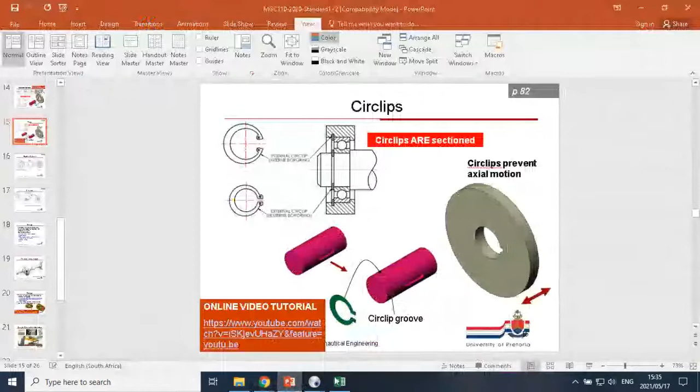And if you use a key and a circlip together, then you basically lock the two components together. So prac assignment 4 marks should probably be out, I don't know, probably this week sometime still. So those were circlips and keys.

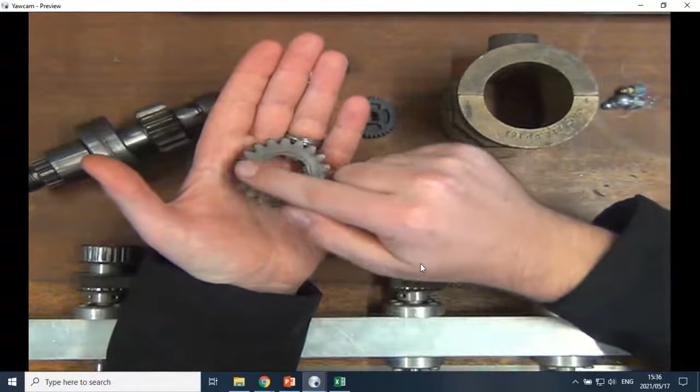Let's quickly discuss repetitive features. Here I have a metal gear, just an example. You can notice this metal gear has many teeth around the circumference, and they're all exactly the same, just a pattern of the same one all the way around. So if you draw this thing, it would be kind of pointless to make a detailed drawing where each of these teeth are actually shown. A shorter way to do this is to draw one of them and then just show a center line to show it is patterned all the way around.

Another application could be bolts that are assembled on the same pattern, like the bolts that hold a truck's wheel in place. So instead of drawing all of them, you can draw one of them and show the center lines for the rest of them.

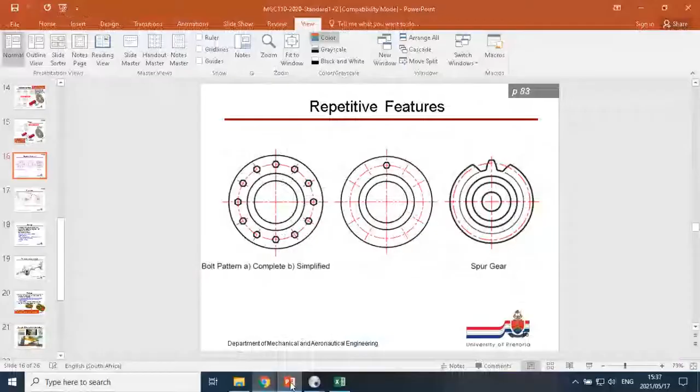Cool, thanks for answering the question for me. Okay, next we've got a chain drive, that would be something like your bicycle. They use chain drives.

Let's quickly have a look at a chain drive mechanism. Okay, sorry for the people who get seasick very easily.

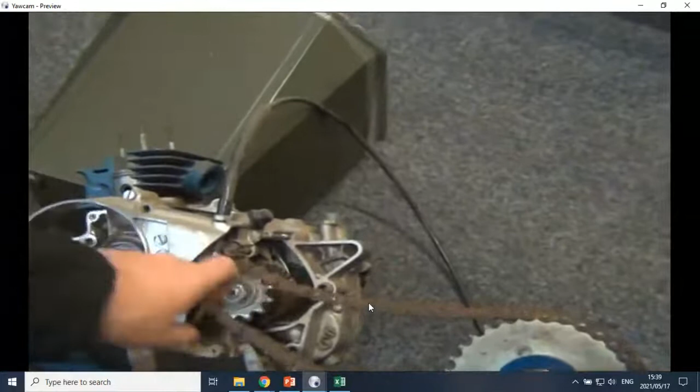Okay, so there we have a cut open motorbike engine on the floor in my office. At the front here we have the front sprocket, there's the back sprocket, and as you rotate the one, the teeth will pull on the chain, which causes the back sprocket to also rotate. Front sprocket, back sprocket, chain. So you can drive the back one by turning the front one.

The same principle applies with gears as well. A gear is used to link two shafts in a rotating manner. You would have the two gears meshed into each other, and as the one gear turns, it causes the other shaft to turn as well. So that's a means of power transmission.

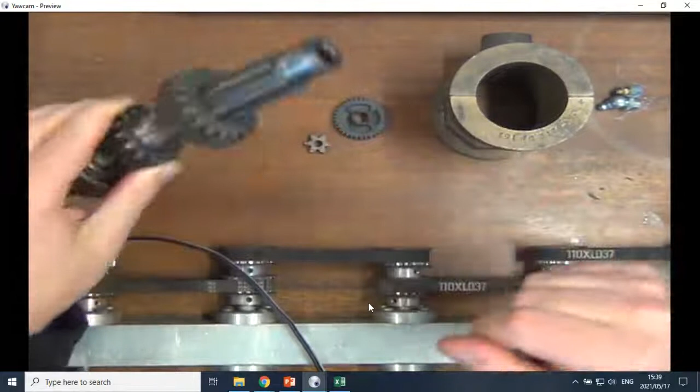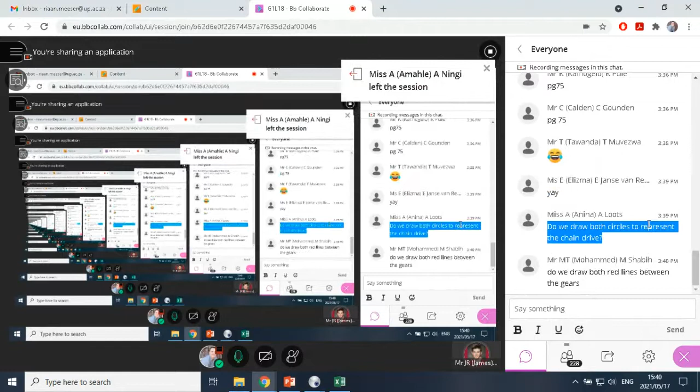With a chain drive, you actually don't even need to show the chain link, because the chain is linked to the sprocket design. So if you specify the kind of sprocket, then you automatically specify the chain size as well.

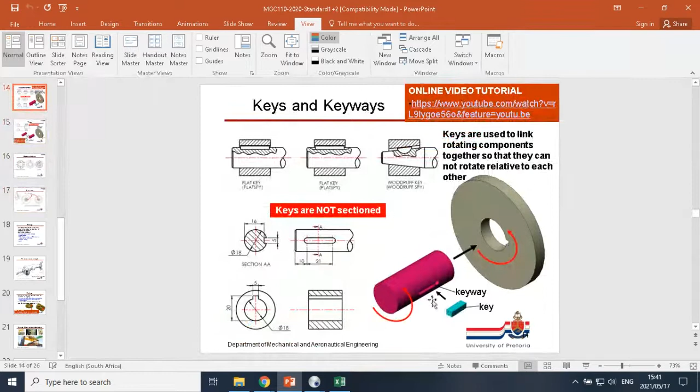Any more questions? No, you don't need to specifically know the exact names of all these things. It will get a little bit technical if we do all of that.

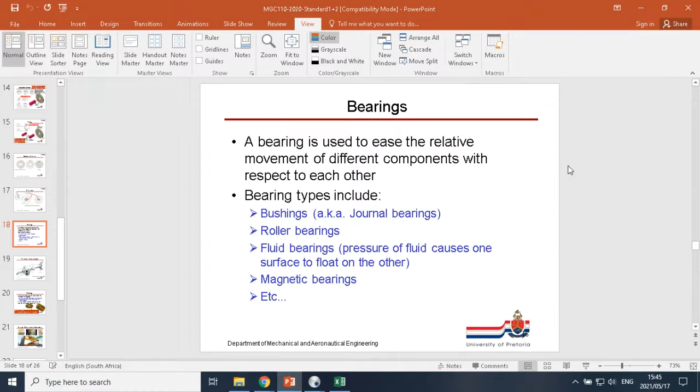Next topic of discussion is something called a bearing. A bearing is used to ease the relative movement of different components with respect to each other. We get different bearing types. The first one is called a bushing, also known as a journal bearing. This is basically just a soft, smooth material that you put between two components so that the one can slide over the other one. That's like putting a blanket between your desk and the floor when you want to move the desk over the floor.

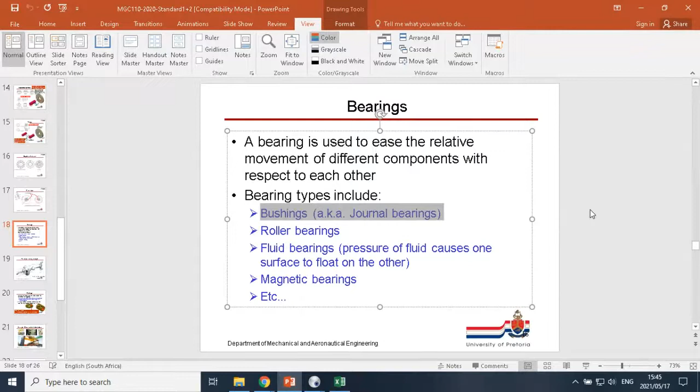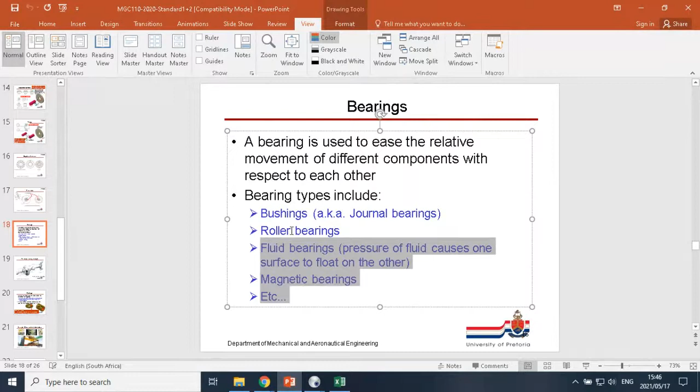Okay, the second type we're going to look at is called roller bearings, which have rolling elements, quite self-explanatory. Then there exist many other kinds of bearings, magnetic bearings, fluid bearings, and whatever. We're not going to really focus on those. We'll just look at the roller bearings and journal bearings in MGC.

Just as an example, the wheel bearing on a car is a normal roller bearing. Usually they use taper roller bearings, but also sometimes deep groove ball bearings. That was just for interest, you don't have to know that now.

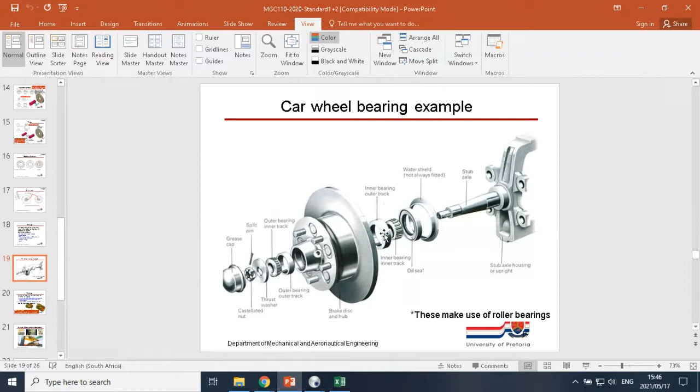Okay, and a bushing. So just for interest, on the shaft on this side we've got this metal ring that can rotate. And you'll see on the inside it's got those little shiny balls. Those are the rolling elements. So basically this kind of bearing works on the principle of something rolling over a surface.

And obviously from that already you can see, and from just a little bit of common sense, rolling bearings usually have a lot lower friction than a sliding bearing, because it doesn't have to drag one surface over the other one, it simply rolls it over.

So it's like when you try to balance yourself on a soccer ball. It's a fairly tricky thing to balance yourself on a soccer ball. If you try to stand on it, you'll just roll off of it due to the very low apparent friction.

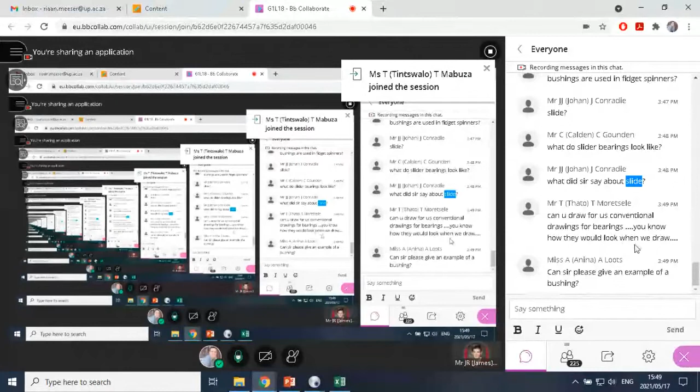Yes, I'm going to do an example of a bearing in a couple of minutes.

So this is an example of a bushing. This is a metal cylinder that gets housed in some other device that clamps it down. And then you can have a big shaft that fits nicely in there, not loosely. So it mustn't rattle around. It must fit nice and almost tight in there, but still free to rotate. Basically a clearance fit. And then this material is usually a softer material than steel.

So this example is a bronze bushing. Bronze is a copper alloy. So basically what happens is the steel shaft will slide on this copper bushing. Now typically you would put some oil or grease in between them to reduce the effective friction. But I'll say more about that in a couple of minutes.

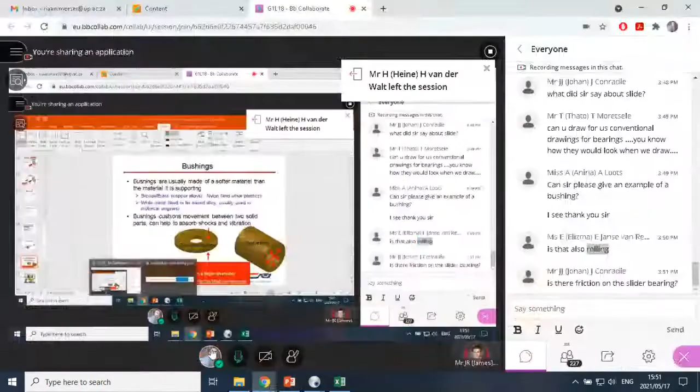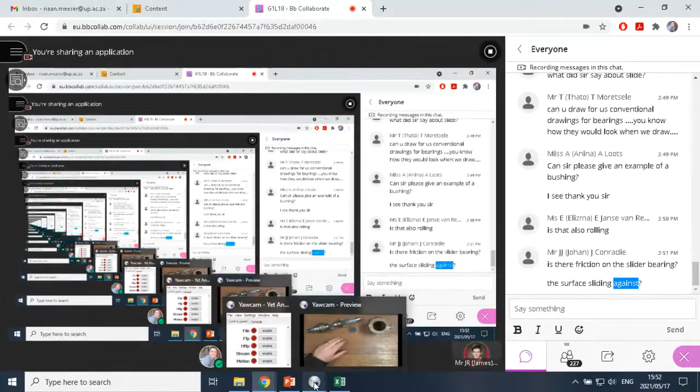Yes, the sliding bearings usually have a rather higher friction, effective friction, than the rolling bearings. So typically in this bushing, the outside would be held stationary in the casing, the shaft would be on the inside and it will turn. And you will use an oil or grease layer to separate the two.

It's like, have you ever walked on a tile floor with flip-flops on? And the floor, if it's wet, then you can step as carefully as you want, your feet just slide around. So basically what happens, if this is the floor and the other hand is the flip-flop, they actually can't make physical contact with each other to transmit friction. If you have a layer of fluid on there, especially soapy fluid, then they will always be separated by a very thin layer of fluid. So basically, if you're walking on a wet floor, you're actually walking on a very thin layer of water. And that's why effectively you can just slide anywhere then.

And a roller bearing like this one would typically then be like trying to walk on marbles.

So each kind of bearing does have its own advantages and disadvantages, and it depends on the application as well. With this big shaft, a journal bearing, or bushing, can usually take a higher force than the roller bearings. Roller bearings can also be slightly more noisy.

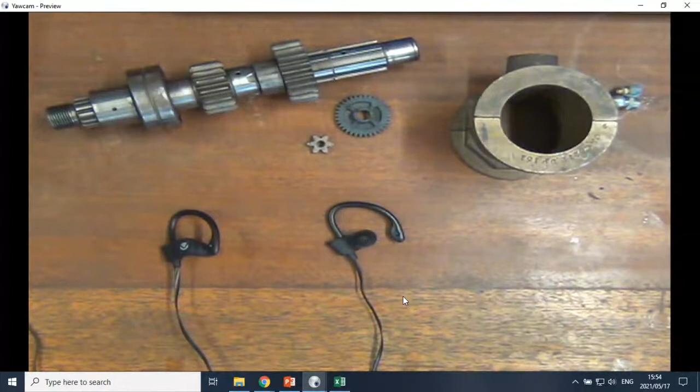So this shaft that I just dropped on the table here is actually a turbocharger shaft. This is the compressor wheel, that's the exhaust turbine. And these are two little journal bearings. So that little cylinder is a copper alloy and the shaft runs inside of it. And it's full of holes because oil is actually physically pumped through there to keep it well lubricated.

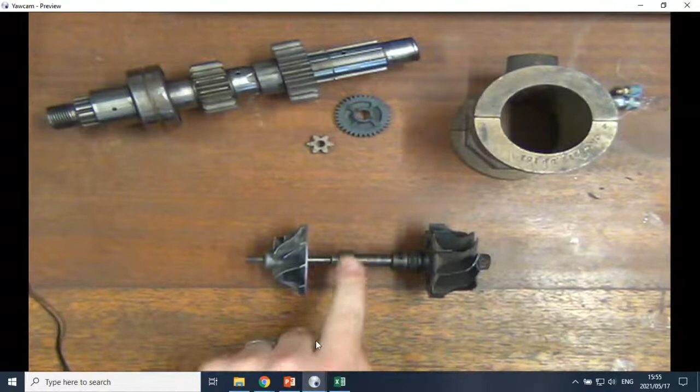Now for interest, this shaft, when it was still working in the turbo, would typically turn 150,000 revolutions per minute. So 120 to 200,000 RPM. Crazy, crazy speed with the journal bearing. You do get ball bearings in turbochargers as well, but that's a different application. Technically, yes, bushings are used in shock absorbers. Yes, you aren't completely wrong with the statement, but it is not quite as simple as that.

So I've collected these things over many years of engineering, fiddling, and stuff. So the turbocharger shaft came out of my dad's business bakkie. The turbo's exhaust housing cracked, and then I took the turbo as a display item. I have some shafts in my cabinet over here, which came from my dad's vehicles, or the one differential came from my own car, which I broke the diff. It sucks to break a diff though. So I collect it wherever I can.

Yeah, it's crazy fast. Some of the smaller high-speed turbos turn faster than 200,000 RPM. I don't think there would really be an application to have a combination of both roller and bushing. Yeah, you do get turbochargers with ball bearings that can spin very fast as well. But basically, the ball bearing or journal bearing isn't the physical limitation of the turbocharger. Yeah, the turbos do make a cool sound. So sliding bearing or bushing is the same thing.

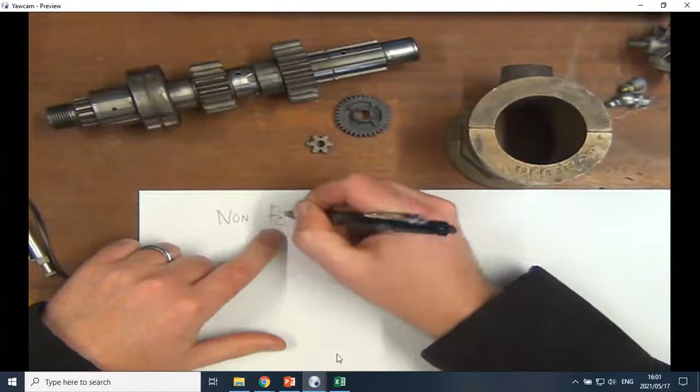Many times, or pretty much always, it is known as a non-ferrous metal. So you'll remember iron, Fe is the symbol for iron. So non-ferrous basically means it does not contain a big portion of iron. These bushings are typically made of a non-ferrous material. It can be a metal, like in this case it is a copper alloy, or it can even be plastic.

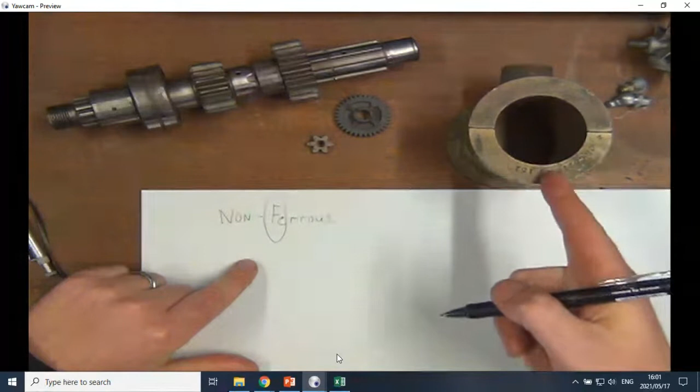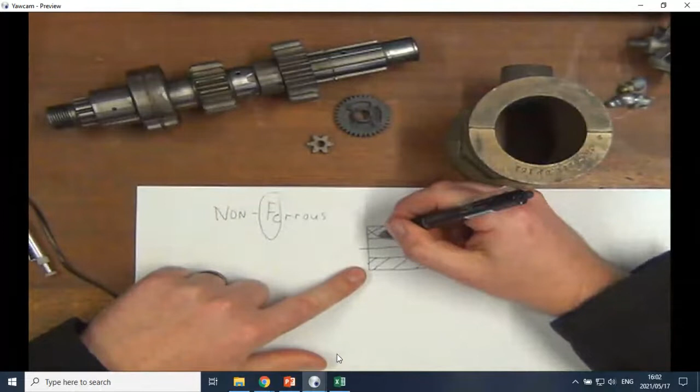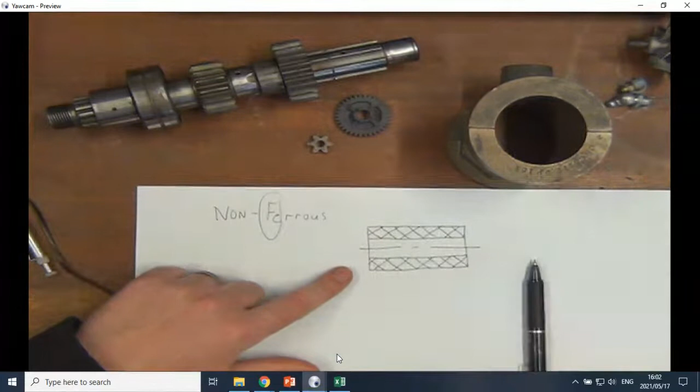Now, something interesting that we can do when we draw a section view of a non-ferrous material, then there's actually a very practical way to indicate in your drawing that you're working with a non-ferrous material. If it was just normal standard steel, we would hatch it like we did when we did section views. Non-ferrous materials, however, are hatched in a method called cross-hatching. So we can indicate that this thing is non-ferrous just by means of hatching it differently. So that's a very handy tip.

Okay, I'm glad it's not my stuff that's cutting.

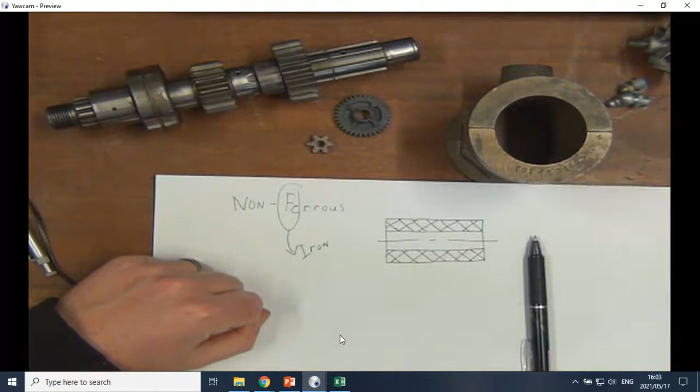So non-ferrous, spelled ferrous, non-ferrous. This is from your periodic table. This is iron. So non-ferrous just means it has very low iron in it, or no iron in it. So it can be plastic or copper or something like that.

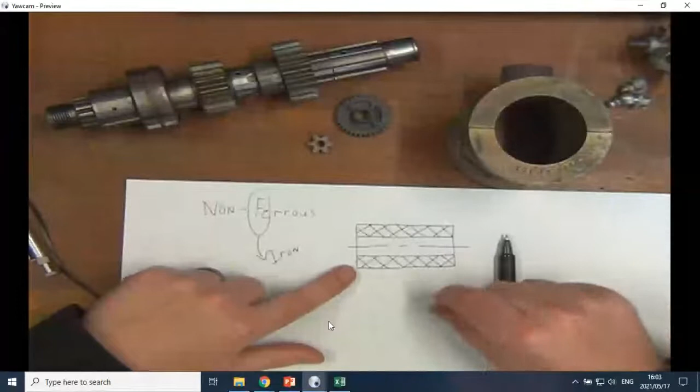Okay, so knurling is something different. Knurling is not hatching. This is a hatching style that we will use quite a lot in our assembly drawings. Knurling is a surface texture that you apply afterwards, which is cool, but we're not going to really touch on knurling in the whole of EGD, so don't worry about that. Okay, so you won't always be told if something is non-ferrous. If it is a bushing or a journal bearing, then it will be non-ferrous. Okay.

Bushings can be used to cushion movement between two solid parts, so it can help to absorb shocks and vibration as well, depending on the material of the bushing. So on the screen here, I have two different kinds of bushings. The one is to be able to take an axial force or a thrust load, and the other one is for a radial force. You basically look at where the biggest area is. It will transmit the force through the biggest area. So in this case, top and bottom, and in that case, inside and outside.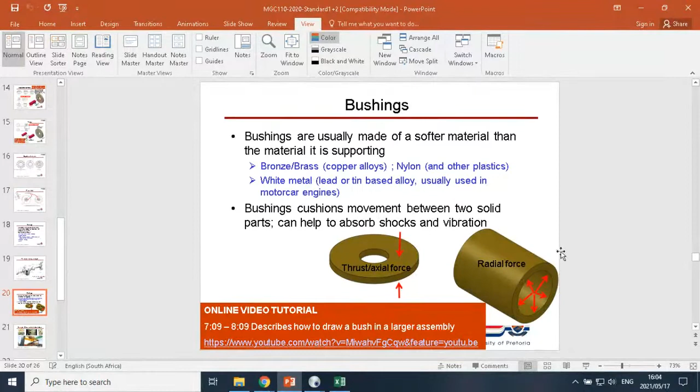So just an example of where you would typically find these journal bearings or bushings. A typical example would be in cable trolleys. So there we have somewhere the big crane, which will have them in on the inside, smaller crane in a workshop. Some of these cable cars will have it in, and this is just a picture of one of those treetop tour foofy slide cable trolleys.

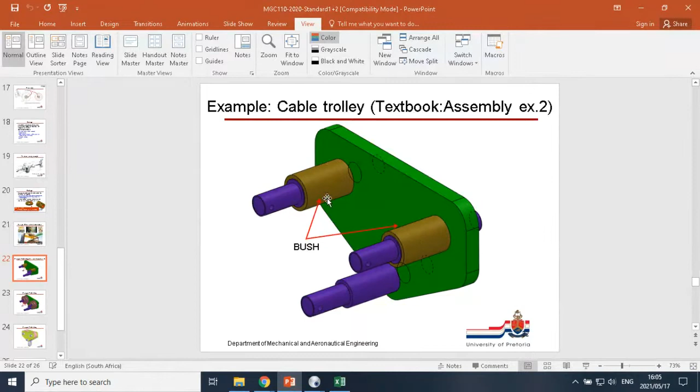In your textbook, assembly exercise 2 has two bushings, and the exact example of the assembly exercise 2 is not really important for today, but basically these bushings are used to ease the relative rotation between the wheel and the shaft. So there I put the wheels on, so the bushing is inside of the wheel. When I turn the wheel, the bushing turns with it, and it slides around the shaft. So that's a typical application for a bushing.

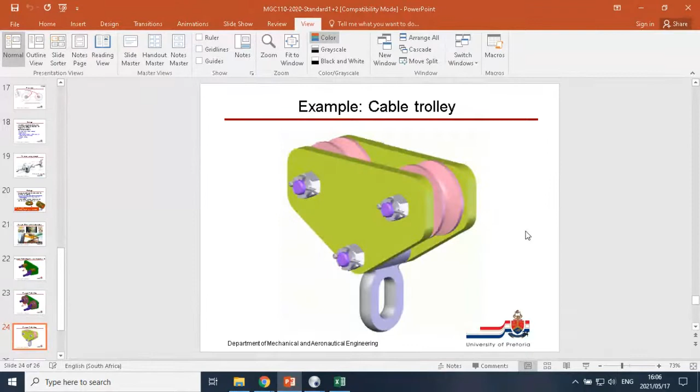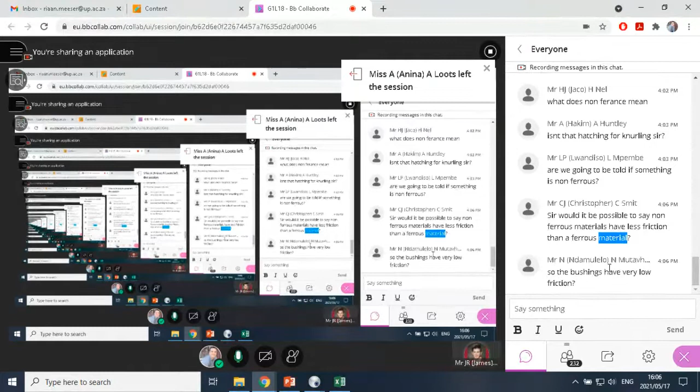I think it's actually pretty accurate to say that the non-ferrous materials which we use for bearings and bushings have lower friction. But you do get other materials like aluminium, which actually has a ridiculously high friction coefficient. So typically the bushing materials that we will use will have low friction, but not all non-iron containing has low friction. But yes, typically you would want the bushing, otherwise it would kind of make it very hard to turn or move the component that you actually want to be able to move.

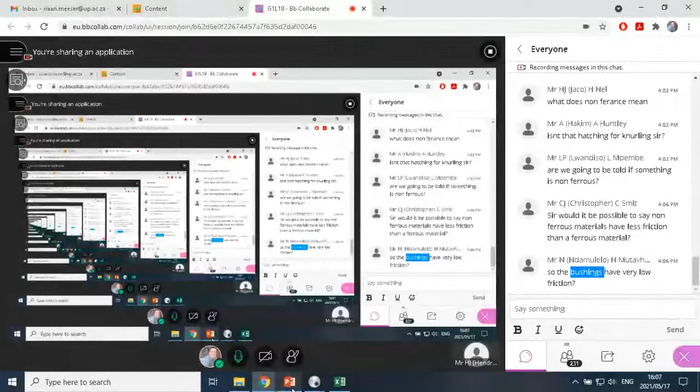Hmm. Okay, someone just signed on and sniffed in the microphone or something.

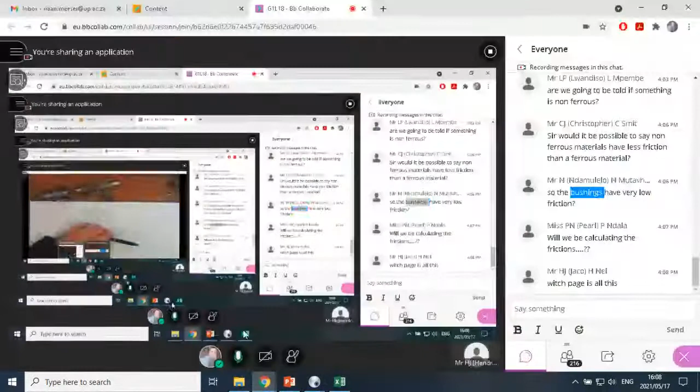Okay, next topic is lubrication. So you remember earlier when I mentioned about walking on a wet tile floor, the layer of water on the tile floor actually causes your shoe or flip-flop or whatever you're walking on the floor with to not contact the floor. There's a thin layer of fluid between the floor and the flip-flop, which causes it to slide over each other very easily. So then adding that layer of lubrication can actually greatly reduce the effective friction. Now, for MGC, we won't be calculating friction coefficients.

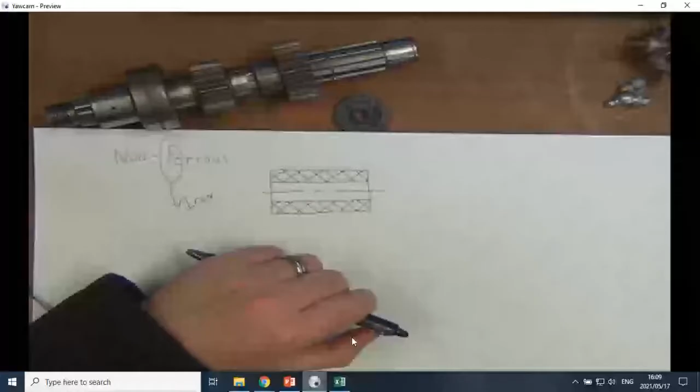Okay, thank you. So just to quickly say again, if my pen is now a layer of liquid, and my left hand is the floor, and my right hand is the flip-flop, when you step on it, the liquid layer actually still separates your foot from the floor, which will cause you to slide. So that's basically the whole purpose of lubrication. So lubrication is necessary when having components moving relative to each other at regular intervals.

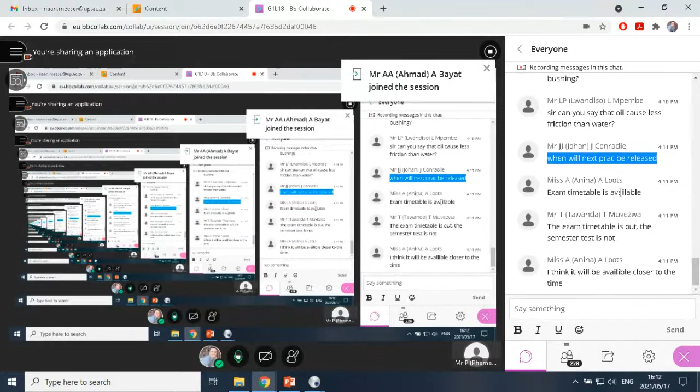Okay, so that was the motivation why we need lubrication. So it is used when you have components moving relative to each other at regular intervals. The mediums include oil, grease, and grease is basically just like a very thick oil, almost like butter. Water can be used as a lubricant, and even air.

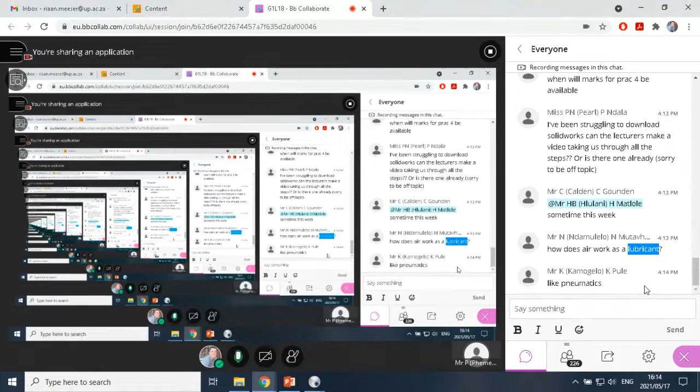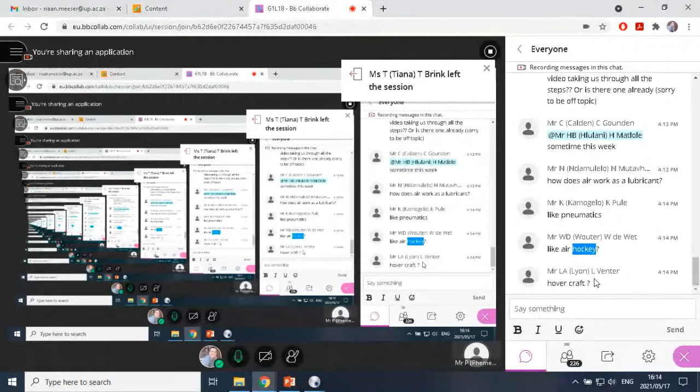Well, yes, pneumatic is basically air, exactly like air hockey and a hovercraft, yes. But the air hockey is a good example.

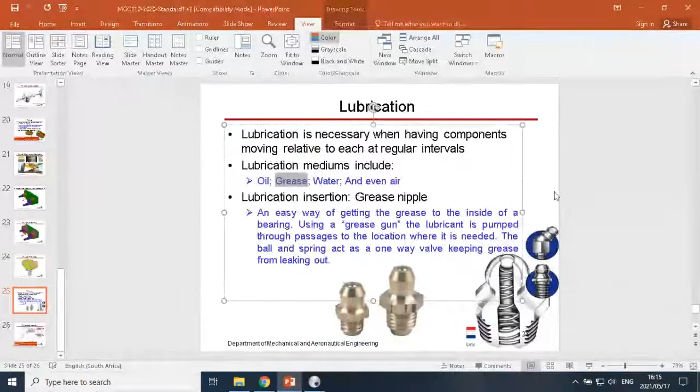Okay, so now the question is, we want grease on the inside of the component. Okay, so we have our journal bearing, and we don't want to have to take this whole thing apart every time and then apply grease on the inside, put it together and assemble the whole thing. So what we want is a device that will allow us to put grease on the inside without opening the device. So basically what we do is we give it a channel. You can see from here, from the top, there's a hole drilled all the way through. And on the inside here, we have a groove as well.

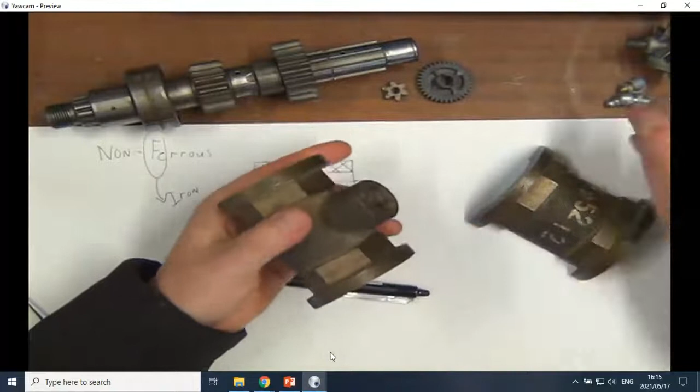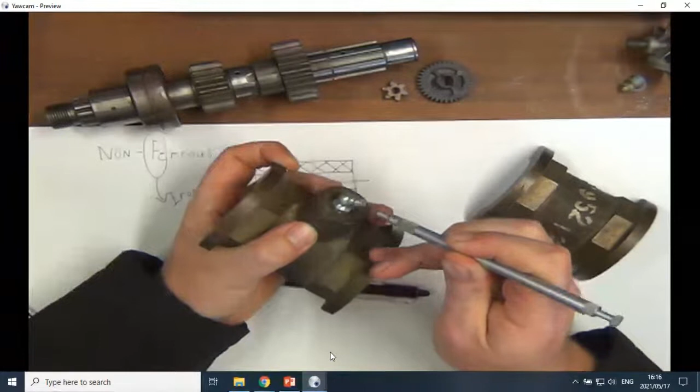So what we do is, we use this item called a grease nipple. And basically what it does, it allows a special hydraulic pumping tool that can pump grease to click onto the end there. And as you pump the grease, it will flow in from the hydraulic line, and then it will meet that little ball at the end there. So that ball is spring loaded. As the hydraulic pressure meets the ball, it will actually push it in a little bit.

So the pressure will push the ball in, and as it pushes the ball in, the grease can flow around the ball through a little channel on the inside, through there, and out the bottom. There you'll see this one has grease in it already.

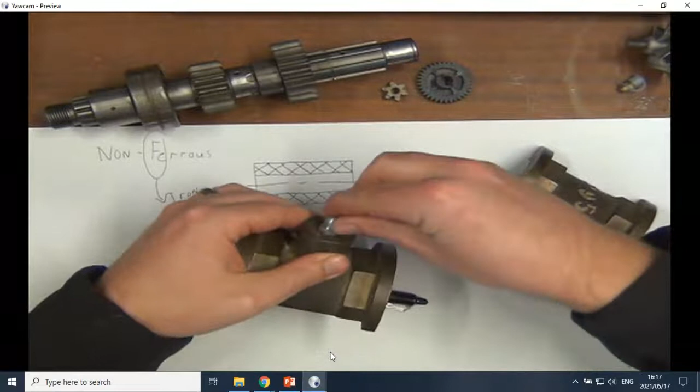So now if I design my machine such that there's a location for me to screw this device in and a little passage on the inside that goes to the bearing, then it will allow me to, from the outside, pump grease all the way to the inside where it is needed.

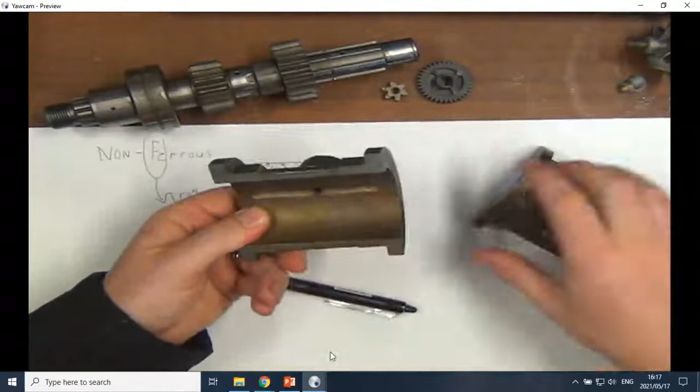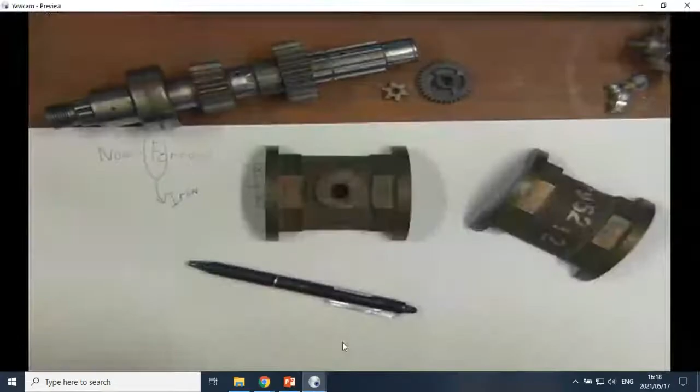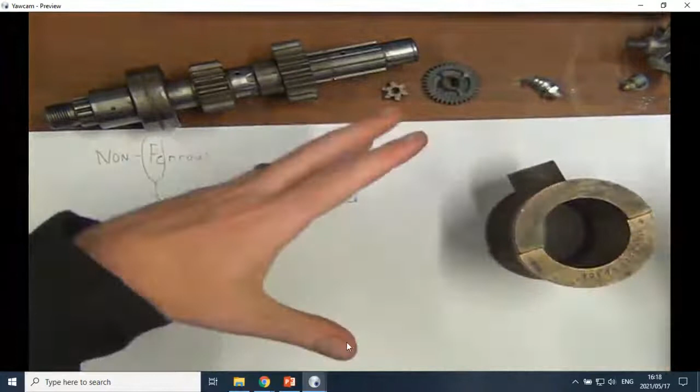Yes, that is correct. That's a very good question, actually. So, old grease can be removed in a couple of ways. The normal way is you just pump in enough new grease that it flows from the inside outwards, and then it will push out the old grease up the outside, and then you can just wipe it off. So in this one's case, you'll remove the old grease by just displacing it with new grease. Otherwise, you have to disassemble, wipe down, and reassemble again.

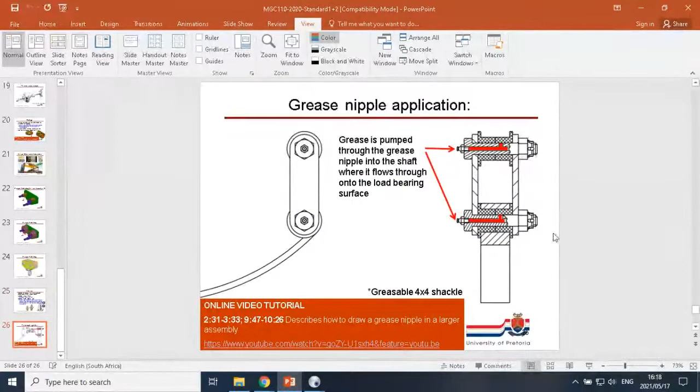So this is just a random example of a grease nipple in application. So there we have the grease nipple. We attach a grease gun to this point and hydraulically push the grease through the center of this grease nipple into the cavity on the inside.

The grease will then fill up that cavity, and once it is full, it will squirt out the hole that's drilled on the side. And when it squirts out that hole, it will go into the inside of the bearing or bushing where you actually need it. So this is a very nice way to, from the outside, put grease all the way on the inside of a component without having to disassemble anything.

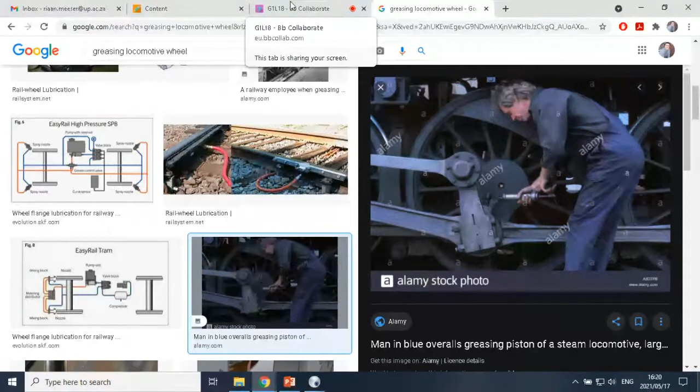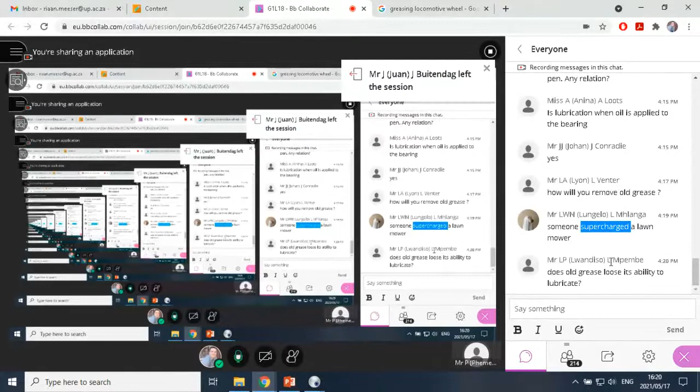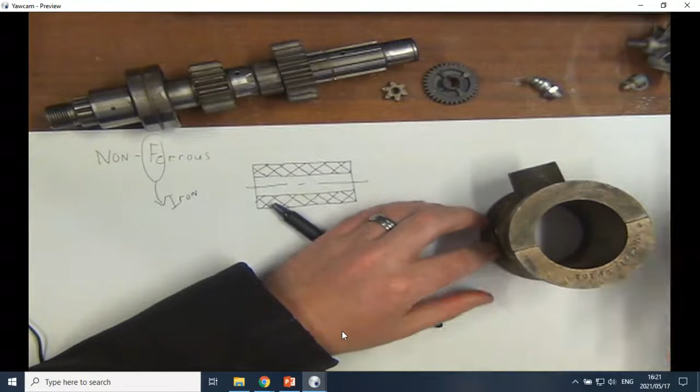Okay, cool. Are there any other questions on what we've said so far today? So typically, old grease doesn't really lose its ability to lubricate, but what does happen is it gets contaminated, so it gets dirty. Basically, as the shaft rotates inside here, after time it does tend to rub away some of the surface. So some of the surface particles will be caught up in the grease, and those particles will be carried all the way around as the shaft is rotating. So old grease will be termed old when it is dirty, basically.

Well, grease is basically a liquid in the very small scale, but practically speaking, it looks a lot like butter. But oil obviously is always a liquid, unless you freeze it, but in typical applications, you don't want your oils to freeze.

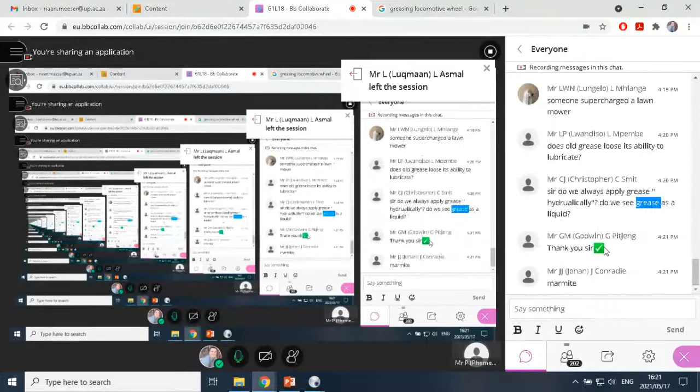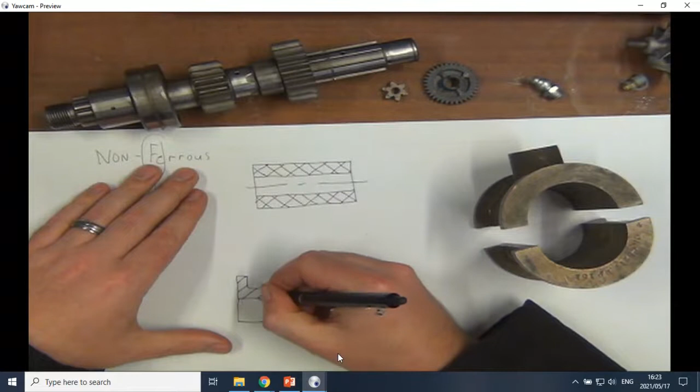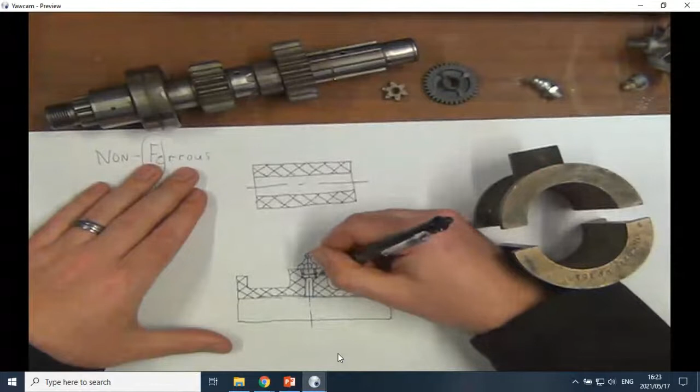Okay, so how do we draw these things? If I take this example, and I'm going to make a section view of it, so we have threading, and then we have the little grease nipple in position. So that would typically be a grease nipple in application.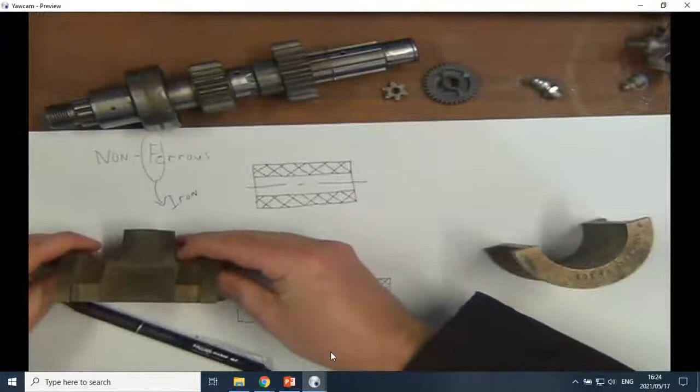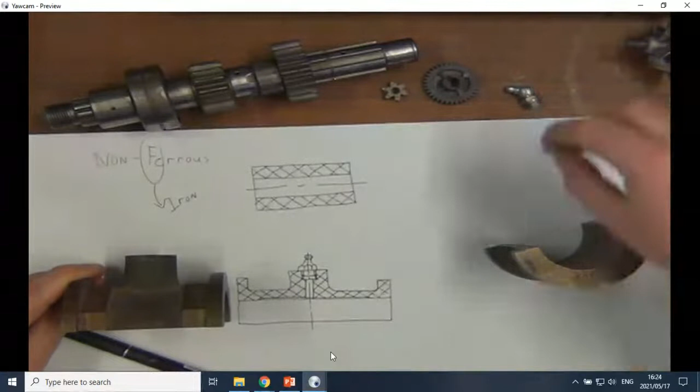Well, the technical term is you just use a grease gun. Okay, so the view I was drawing was this view, just in full section through the middle of the grease hole. So a grease nipple is a standard component, so we will usually not cut through it. Same as a bolt and a nut.

Typically, bearing seizure occurs due to lubrication failure. Lubrication failure can be due to there not physically being enough, or it could be due to excessive temperatures. If your system is overheated, then the lubrication becomes so thin that the gap becomes too small between the two parts and they start making contact and then eat each other away.

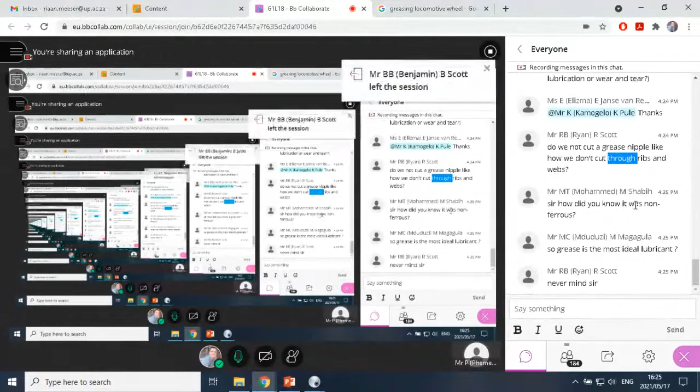So no, a grease nipple is actually not sectioned at all. I knew it was non-ferrous because it is a journal or bushing material, which means it has to be non-ferrous.

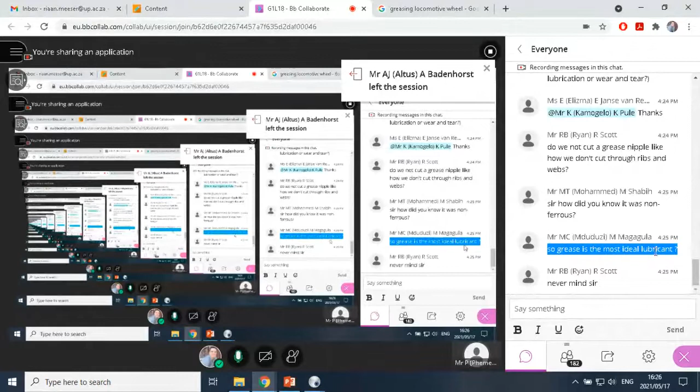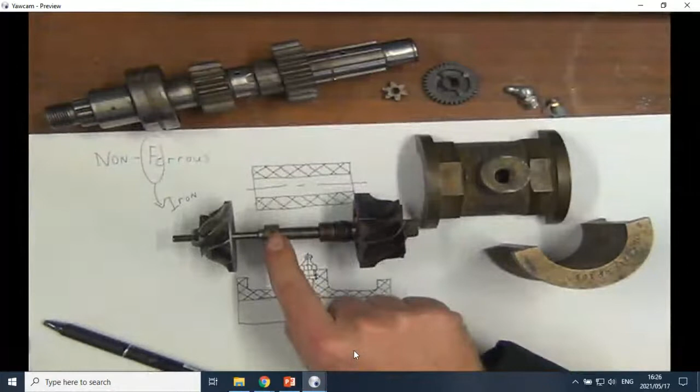It actually doesn't, it depends on the application. For certain bearing types, like this journal bearing I just showed you, grease is ideal. But if you have high-speed applications, like this turbocharger example, then grease would actually not work at all. It just turns too fast. So in this one's case, these bearings are actually lubricated by the engine's oil. That's also usually why turbocharged vehicles need a better quality oil than normal non-turbo engines.

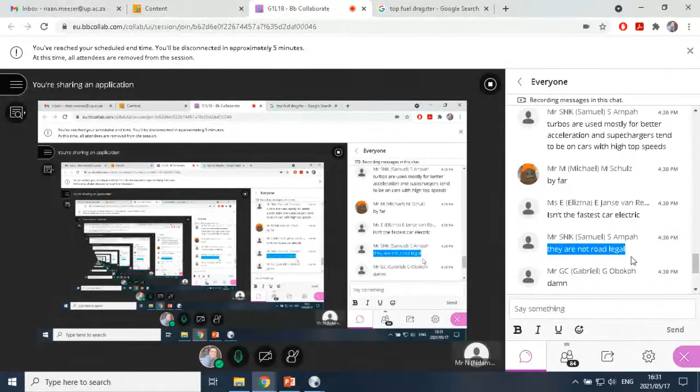But the supercharger on one of these top fuel dragsters uses the same amount of power as what a Corvette actually makes. So if you take a Chev Corvette V8 engine, that engine just has enough power to turn the supercharger on the dragster. The Chiron, I think, makes 1,500 horsepower. These things make 11,000 horsepower.

So no, superchargers usually don't have a significant or really perceivable lag. I remember on my car, you have to really kick the accelerator to the floor to actually be able to perceive a lag. Otherwise, as you push the accelerator in, the boost goes up. The Teslas are not the fastest cars in the world. And turbo lag is not so bad. A Corvette makes about 600 horsepower, that is true. A top fuel dragster supercharger takes 600 horsepower to turn.

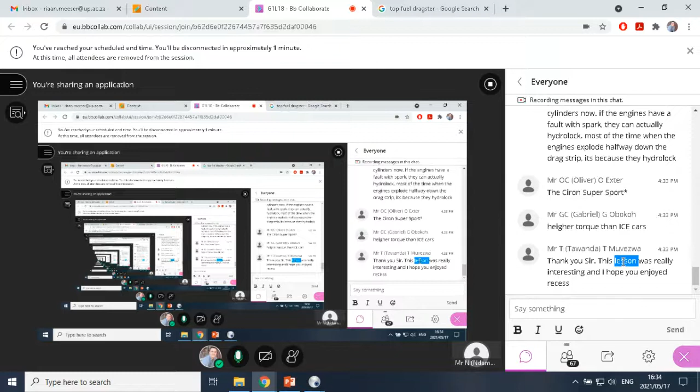What's interesting, your question about combining supercharger and turbocharger. Volkswagen did it on their first generation Polo GTIs, which had a 1400 with a supercharger and turbocharger in there. What's interesting, the pressure in a top fuel engine is about 10 times as much as the pressure in your road car.